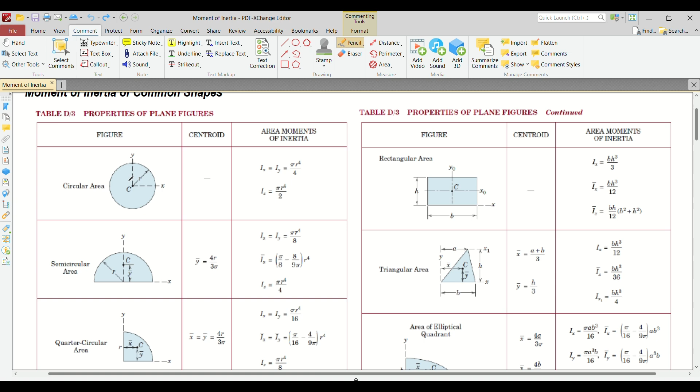Now, when our figure is not composite, let's say we have a circular figure, the moment of inertia is pi r to the fourth over 4. Remember, this is centroidal, since we have different moments of inertia. When we say centroidal moment of inertia, it means you are getting the moment of inertia about the centroid. That's also true especially if the material doesn't change; the centroidal moment of inertia and the moment of inertia about the neutral axis are just the same. Let me repeat, the centroidal moment of inertia is always with reference to the centroid. So now we have for circle pi r to the fourth over 4.

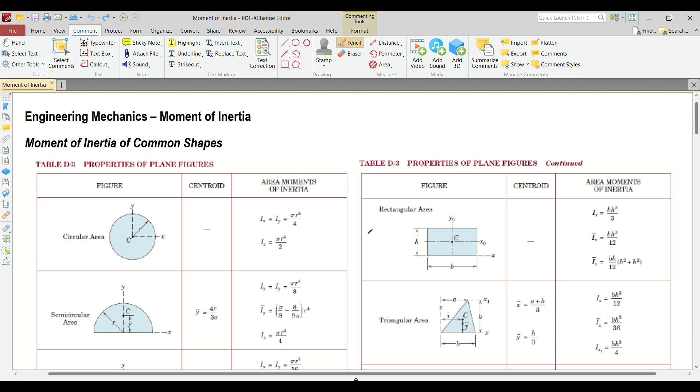Now for rectangle, that's bh cubed over 12. So what is this bh cubed over 3 for? This is if we're getting the moment of inertia about this x-axis. There are actually two, and in fact there are many, it all depends on your reference. In our case, since there's no bar, usually when you get the centroidal moment of inertia there's a bar. Since there's no bar, it means the moment of inertia being taken is about the x-axis. Since this one has a bar at the top part of letter I, we're getting the moment of inertia about this centroidal axis.

Again, let me repeat, if we have a homogeneous material, meaning our material is the same, then the moment of inertia about the neutral axis is also equivalent to the centroidal moment of inertia. So now it depends - we have Ix bar and Iy bar, and we also have Ix and Iy. So it has a lot of variation in the formula, but we're going to discuss I NA for now.

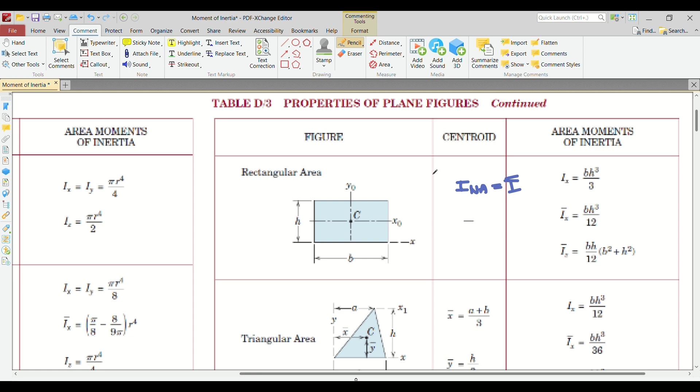Now, how do we get the moment of inertia about the neutral axis, especially for irregular figures? If a given shape's moment of inertia is being evaluated about an axis that is not coincident but parallel to its centroidal axis, we use the transfer formula. The transfer formula states that the moment of inertia about any reference axis parallel to one of the centroidal axes is equal to the sum of the moment of inertia about the centroidal axis and the product of area multiplied by the moment arm about the reference axis, squared.

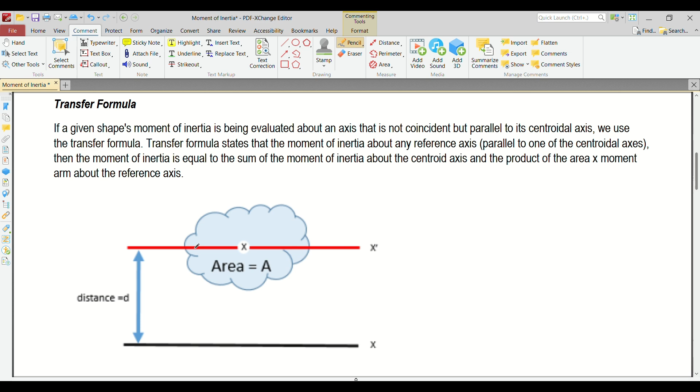So let's say we're going to find the moment of inertia of this figure. According to the formula, to get the moment of inertia about this axis, that is equivalent to the summation of the centroidal moment of inertia of this figure, plus the area of this figure multiplied by the distance of the centroid perpendicular to your reference, squared. So if this is your centroid and this is your reference, the distance here is D, and you square that. So this is the resulting formula.

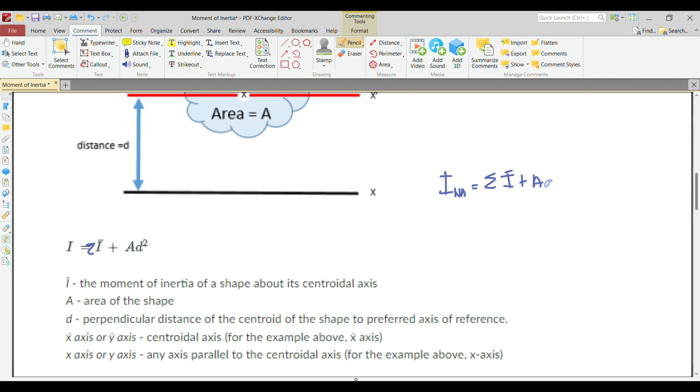Let me fix this. So the moment of inertia about the centroidal or neutral axis is equivalent to the summation of I bar plus AD squared. Again, the I bar there is the individual centroidal moment of inertia of the individual figure, the area A is the area of the individual figure, and D is the distance of the overall centroid versus the individual centroid, which you then square.

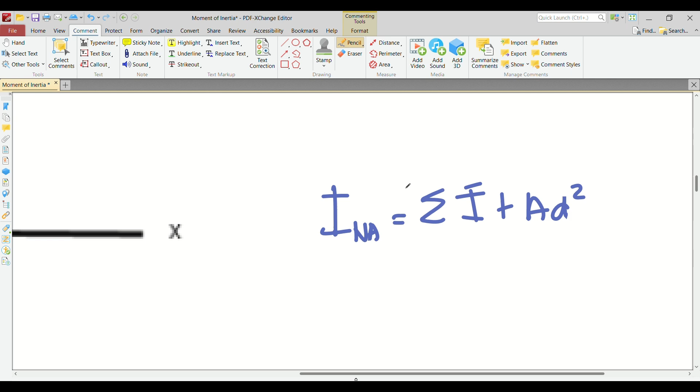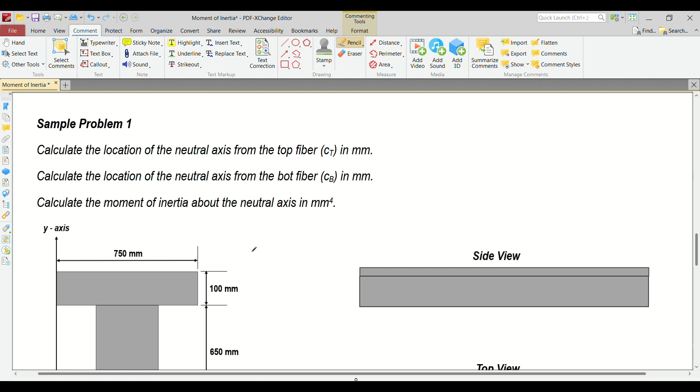So to understand this better, let's try to solve this problem. It says: calculate the location of the neutral axis from the top fiber, CT, in millimeters; calculate the location of the neutral axis from the bottom fiber, CB, in millimeters; and letter C, calculate the moment of inertia about the neutral axis in millimeters to the fourth power.

Now, this is our figure. If you look at the side view, this is how it looks. If you look at the top view, this is how it looks. So now, how do we solve this figure?

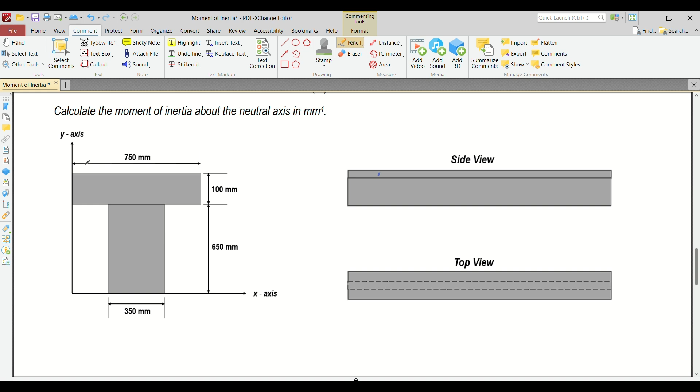In order to solve this figure, the first thing you need to do is set the reference axis. So this is my x-axis, and this is my y-axis. The next step here is to get the centroid of this figure. How do we get the centroid?

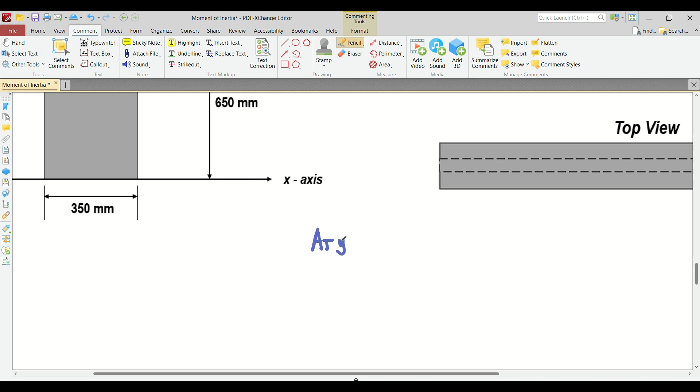We have a concept called Varignon's theorem. What is Varignon's theorem? It states that your total area multiplied by the centroid is equivalent to the summation of the individual areas multiplied by the individual centroids, however many there are.

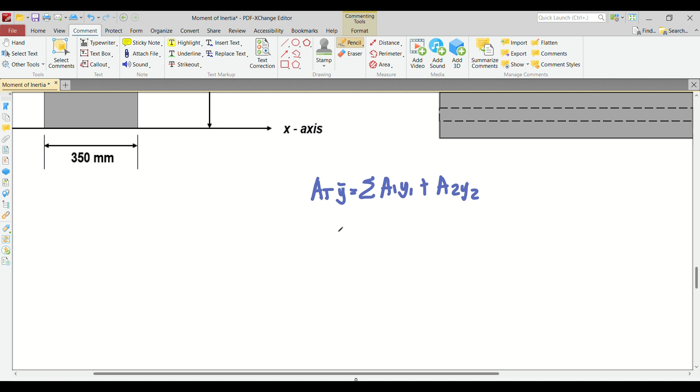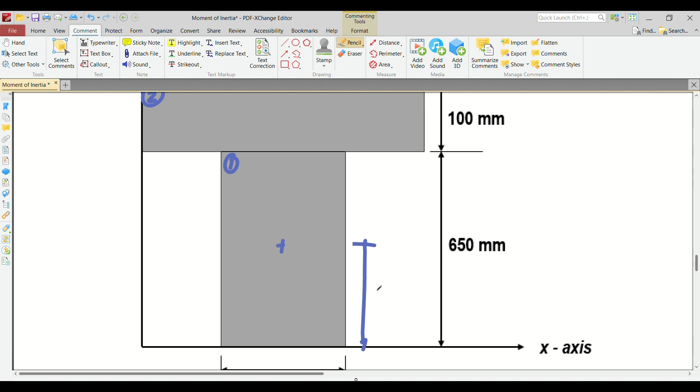So, to get the y-bar, that is equivalent to area 1 and area 2. In our case, let's assume this is area 1, and this is area 2. Our individual centroid, with reference to the x-axis, is here. The distance is, this is 650, half of 650 is 325. So this is 325 mm. Now, for the one at the top, this is its centroid. So what would that be?

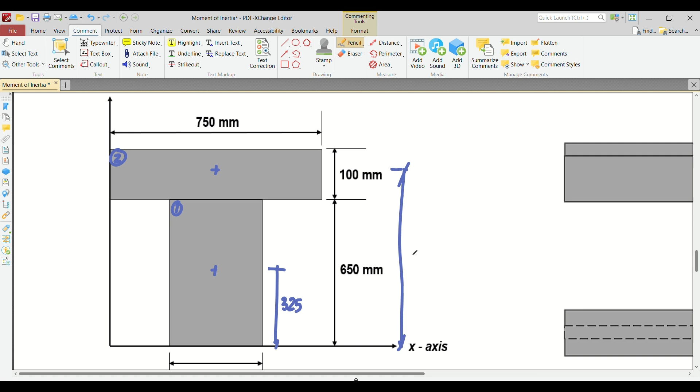So, ang distance nito is 650 plus kalahati ng 100. So, that is 700. Okay? So, ngayon, meron na tayong individual centroid.

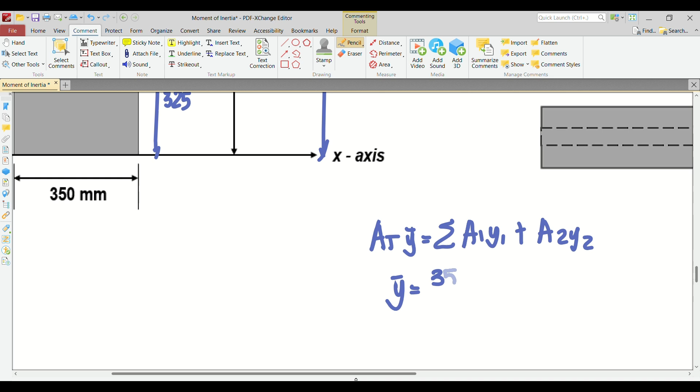Madali naman kuhanin yung area. So, let's proceed, yung area 1 natin is just equal to 650 times 350. So, ilagay natin: 350 multiplied by 650 multiplied by the individual centroid. So, that is 325.

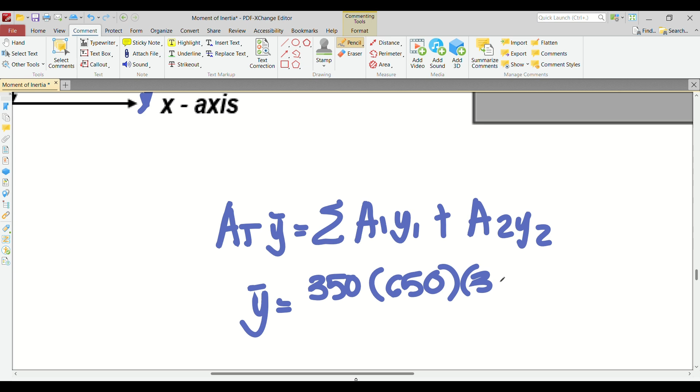Okay? So, plus area sa taas, that's 750 times 100. So, ilagay natin dito, multiplied by individual centroid, that is 700.

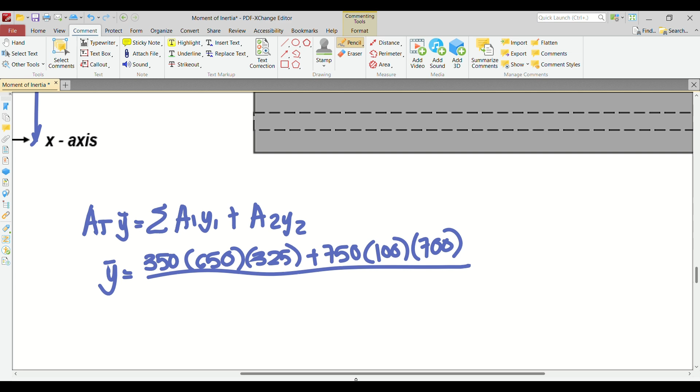Okay? Divided by the total area, which is equivalent to 350 times 650, plus 750 multiplied by 100.

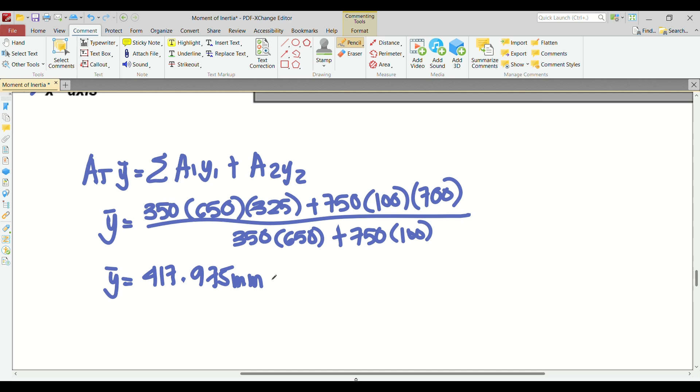So tignan natin yung problem number 1, yung unang tanong. Sabi dito, calculate the location of the neutral axis from the top fiber. So, ngayon, ang nakuha natin is centroid.

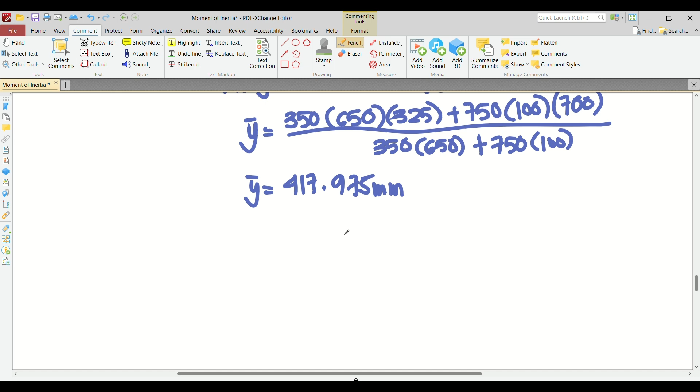If we have a homogeneous material, ibig sabihin, ito yung concrete din, or itong nasa baba, concrete din, or parehas silang steel, or parehas silang timber. Kapag ganun yung scenario, kung ano yung centroid mo, yun din yung neutral axis mo.

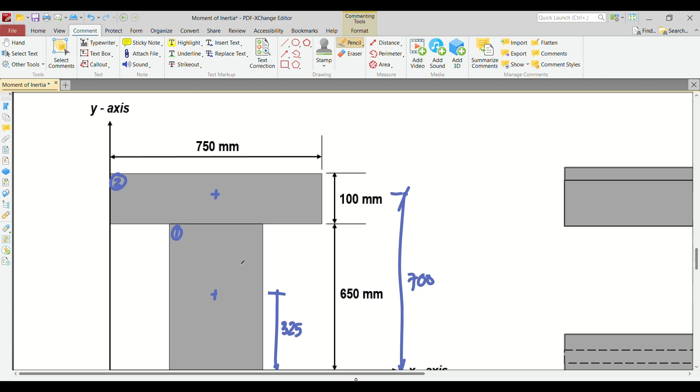Nagkakaintindihan? If you have a homogeneous material, kung ano yung centroid mo, yun din yung neutral axis mo. So, since this is probably a homogeneous material, therefore, ito rin yung centroid natin. And remember, that is with reference to our x-axis at the bottom.

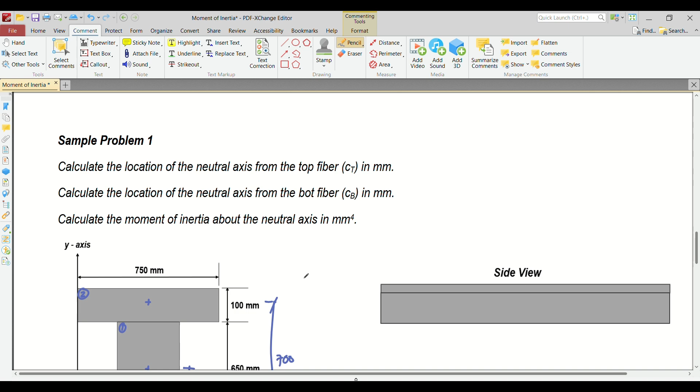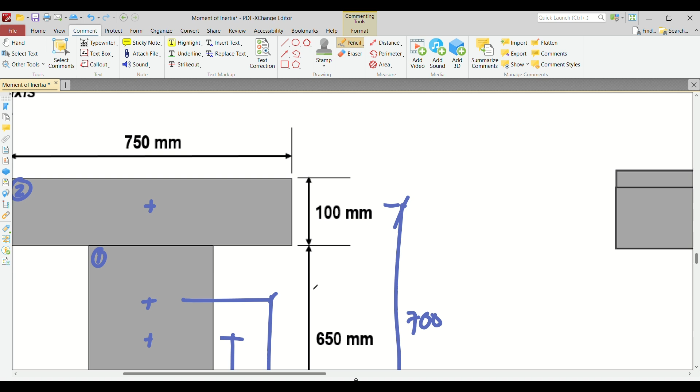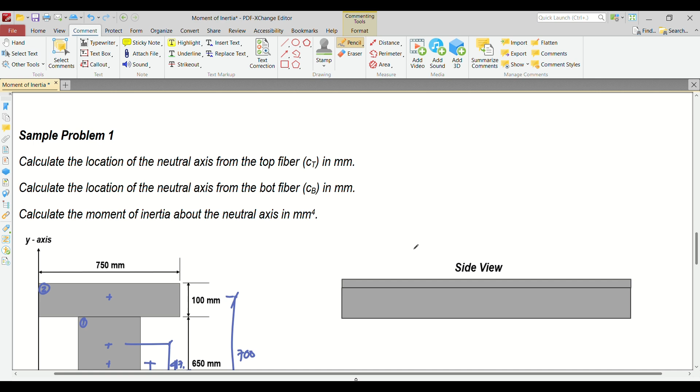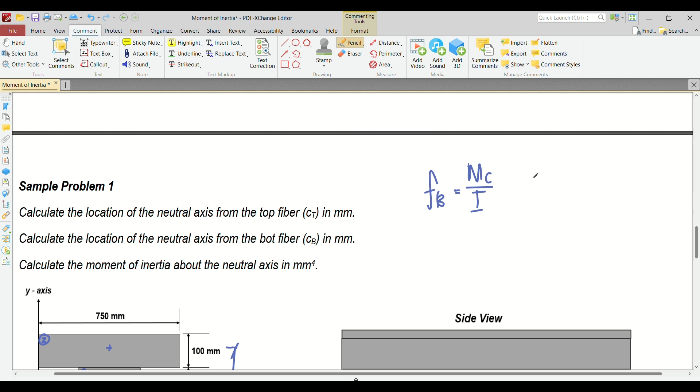Okay? So, ngayon, this is 417.975. Ang hinahanap sa atin is C sa top. Saan ba ginagamit yung C sa top? Di ba meron tayong bending formula na MC over I. So, yung C, it can be either C sa top, tsaka C sa bottom. So, in our case, ang hinahanap, C sa top.

So, ano ba yun? Ito yun, so from here to here. Yan yung tinatawag natin na C sa top. So, now, how do we get that?

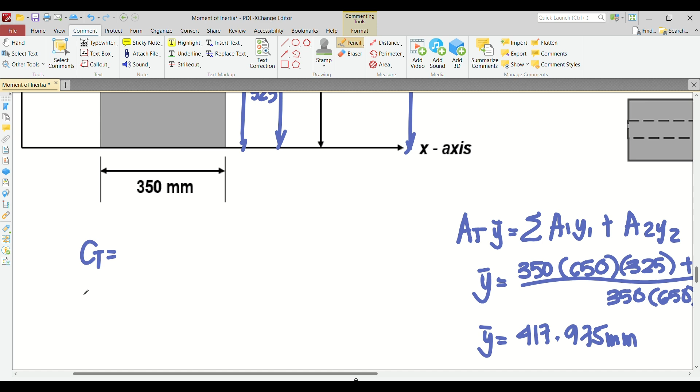Madali lang. E di yung total height, minus mo lang ng 417.975. So, therefore, if we're going to find C sa top, that is just equivalent to ano ba yung total height natin? 650 plus 100, so that's 750 millimeter minus 417.975 millimeter. Okay, yung C sa top natin is just equivalent to 332.025 millimeter.

So this is now your answer for the first statement. Box ko lang.

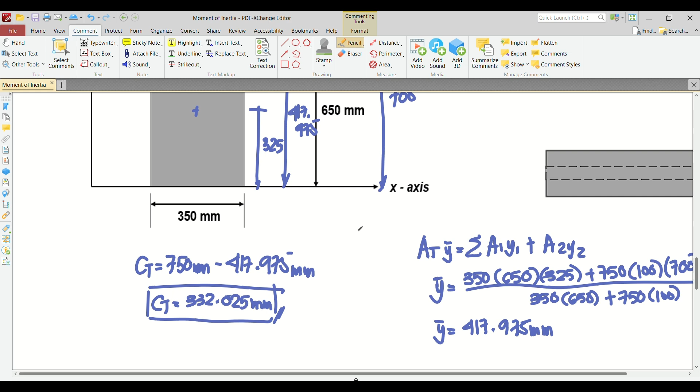Okay? So ngayon, anong tanong sa pangalawa? Calculate the location of the neutral axis from the bottom fiber. O di ba ito yung bottom fiber, yung nasa x-axis natin.

So ngayon, ito naman din yung ating CB. Kasi ito yung centroid, ito yung bottom fiber, coincide dun sa neutral axis natin. So therefore, na-compute na pala natin yung CB, which is equivalent to 417.975. Same lang sila ng y-bar.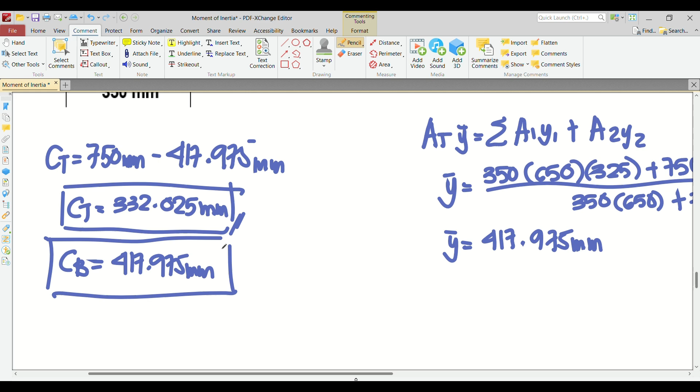Okay? Kasi ito yung y-bar natin. Lagay ko na nga. Okay?

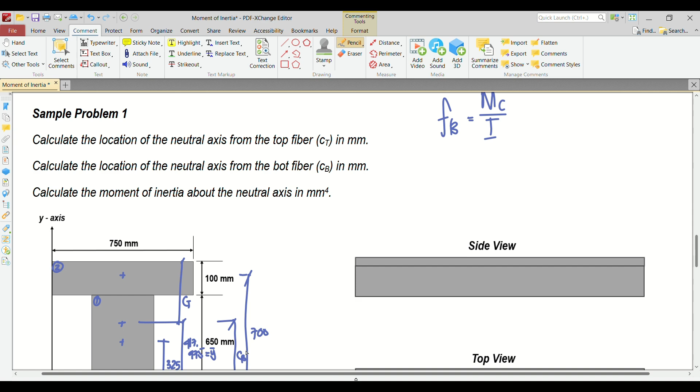Okay, so ano yung susunod na tanong? Sabi dito, calculate the moment of inertia about the neutral axis. Now we have two moment of inertia na centroid. So number one is...

I, neutral axis with reference to x. Tsaka number two is I, neutral axis with reference to y. Kapag I NA x, that is summation of I, O, or centroidal moment of inertia, plus, or minsan bar yun nilalagay, plus A dy squared. Yung dy natin is the centroid of the individual figure minus the general centroid in y-axis, kasi perpendicular to the axis considered.

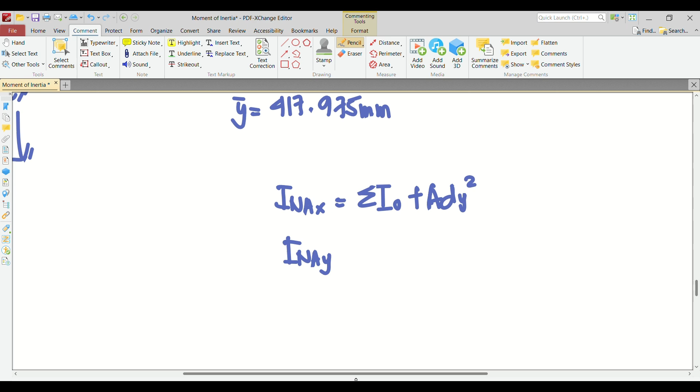Remember right here, yung d na kino-consider natin, for example, ito yung axis na sinosolve mo. Yung d na kino-consider natin dito is dy kasi pataas, hindi siya papunta sa left, papunta sa right. Okay? So, ganun din dito.

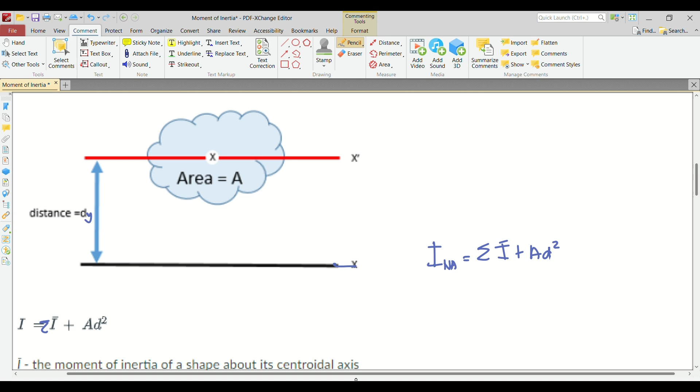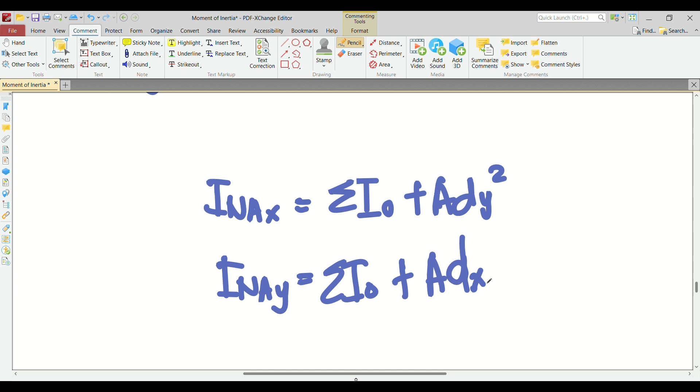If I NA x yung hinahanap mo, so syempre, yung gagamitin mong d is with reference to y. Okay? So, ngayon, kapag I NA y naman ang hinahanap mo, so yung d mo dito is with reference to x. Tapos may square diyan.

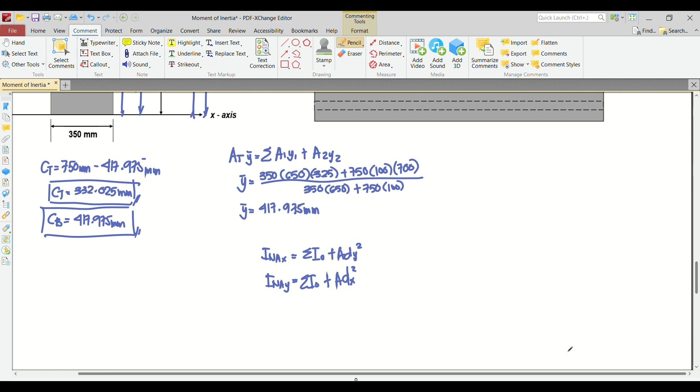Okay? So siguro solve na rin natin parehas. But before that, we must need to identify what is the centroid or what is the distance of the centroid from our y-axis. Okay? Para ma-solve natin yan, Varignon's lang din.

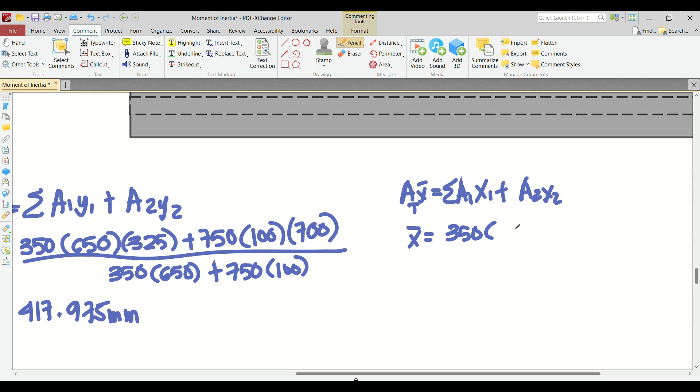So, that is x bar is equivalent to, sulat ko na nga rin dito, A1 summation. Okay, so therefore, this is 350 multiplied by 650, the area of our first figure. And then the centroid of that with reference to our y-axis is...

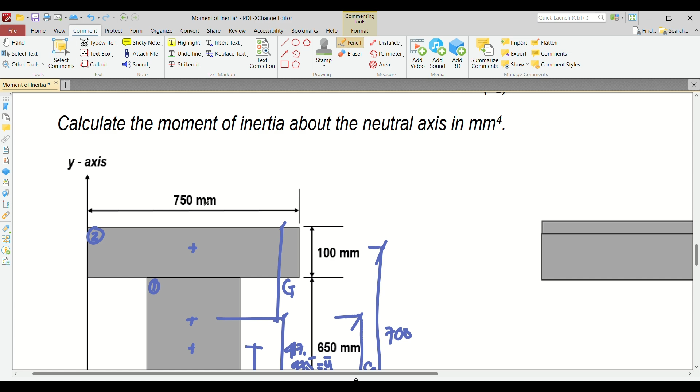Kalahati ng 750, ito di ba? 750 divide 2. Ilang kaya yun? 375.

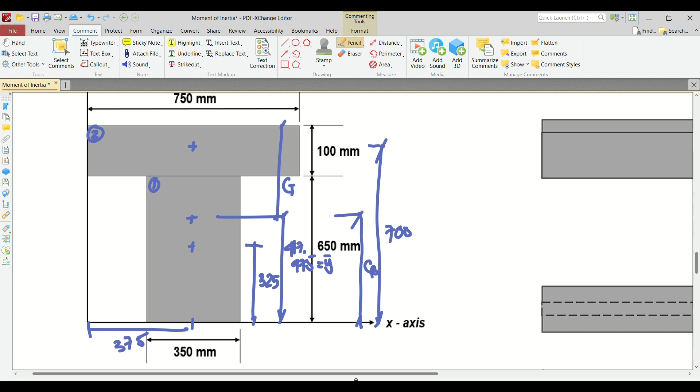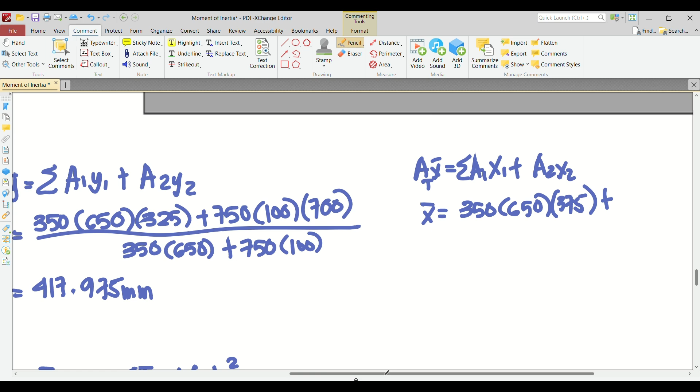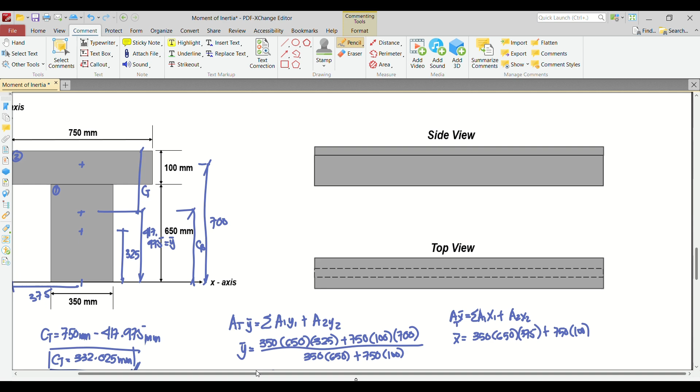So, ilagay natin dito. 375 mm, plus area 2, that is 750 times 100. Tapos, distance niyan ulit, ganun lang, pareha sila, no? Kasi rectangular lang naman yan. So, ito, 750. 750 divide 2. So, malamang ito rin 750 divide 2, no? Okay? Kasi nasa center naman itong rectangle na to eh, no?

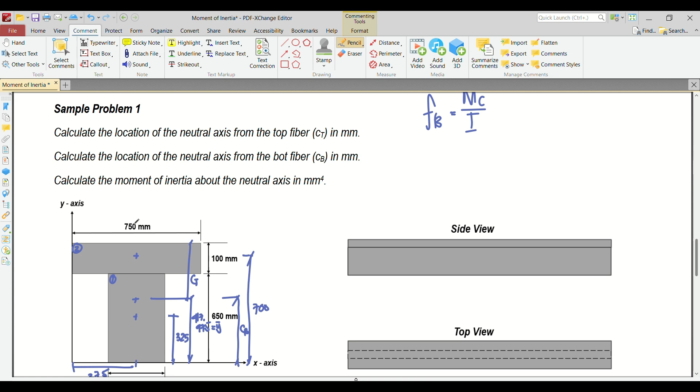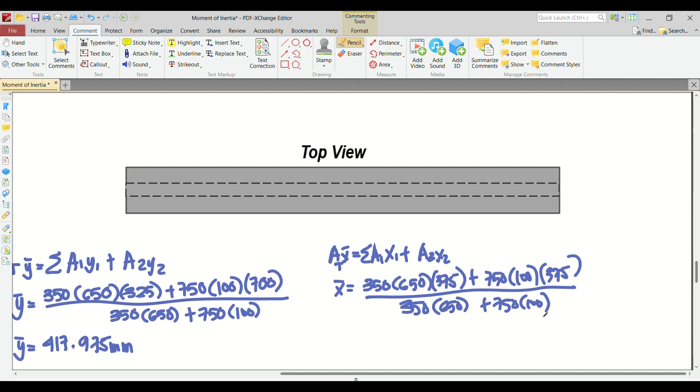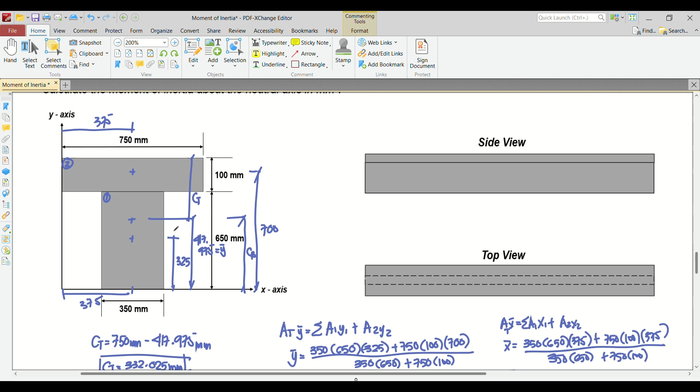Again natin. This is 375. Okay? Divided by the total area. 350, 650, plus 750 times 100. So, kapag sinolve mo yan, mapapansin mo na yung x bar mo is just equivalent to 375. Actually, by inspection, alam mo na agad yan, kasi nga, with reference to y-axis, ang centroid nito 375, ang centroid din nito 375. Since pareha sila, malamang yung centroid na to, itong x bar natin, is just equivalent to 375 mm.

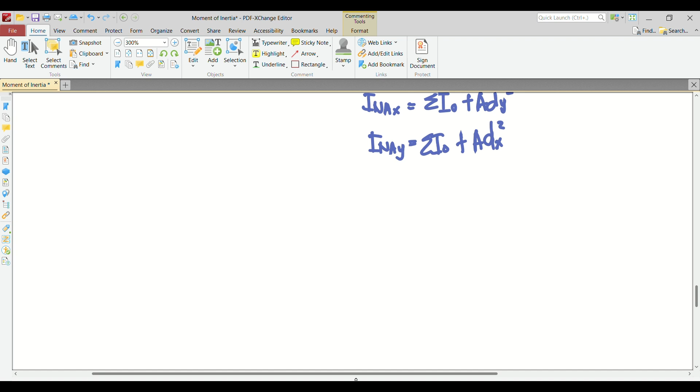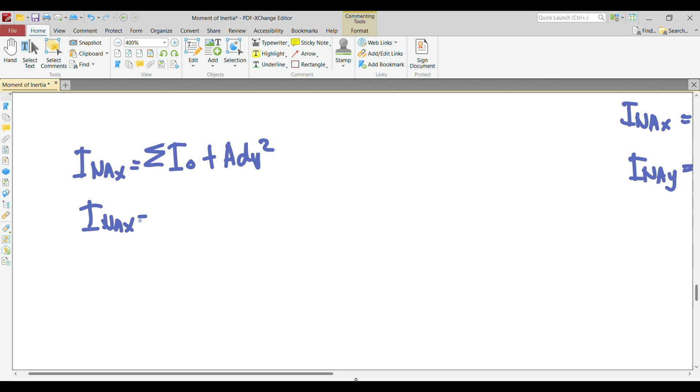Okay? So ngayon, let's try to compute. Unahin na natin si I NAx, no? Sige, dito na lang. So I NAx, that is the summation of IO or centroidal moment of inertia plus ADY squared. So ngayon, birahin na natin. I NAx, ano yun? Unahin muna natin yung first figure. Diba? BH cubed over 12.

So ang B is 350, ang H is 650 with reference to the first figure. So lagay natin dito: 350, 650 cubed divided by 12. And then plus 350, 650, the area, d squared, dy squared.

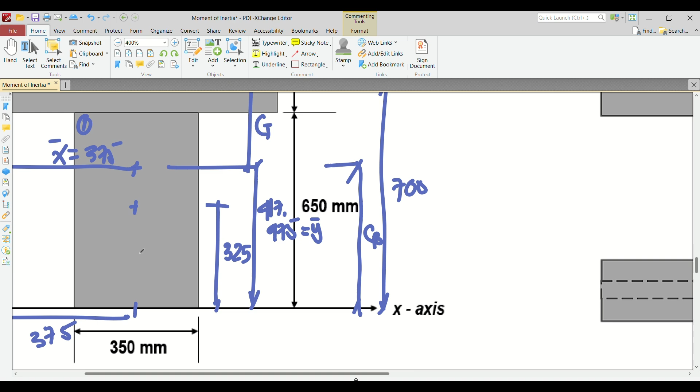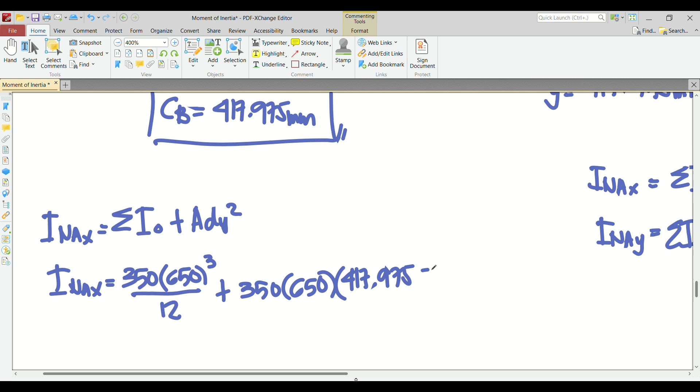Ano yung dy squared naman natin? Again, distance yan from the general centroid minus the individual centroid. Or ito, tinatawag natin dy. Okay? So, ilan yan? Edi 417.975 minus 325. So, lagay natin dito: 417.975 minus 325. Don't forget, kailangan mo siyang square. So, that is for our first figure.

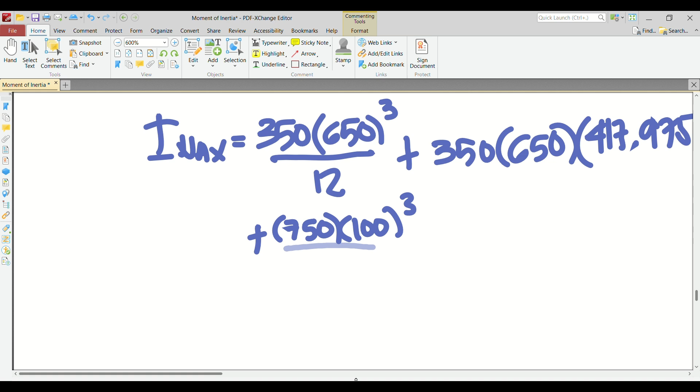For our second figure, ito naman yun. So, gano'n lang ulit, BH cube over 12. Our B here is 750, and then ang H natin is 100. Okay? B, 750, 100, cube, divided by 12, plus, area, 750 times 100, centroid, or dy squared.

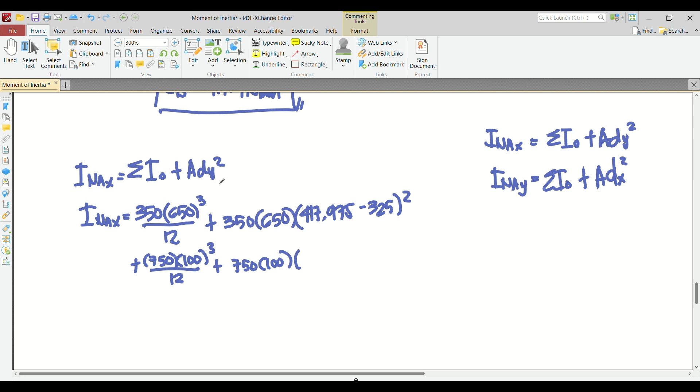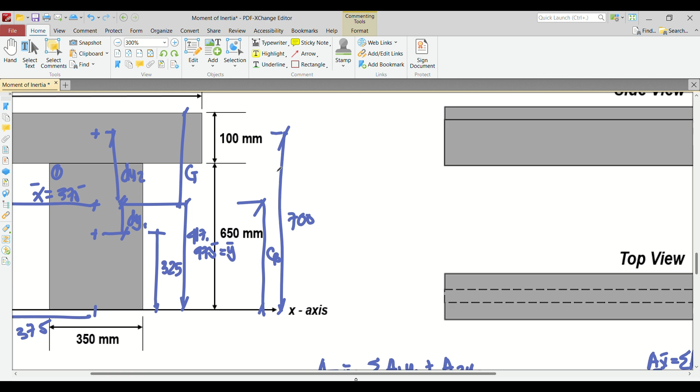Ano yung dy squared niya? Lagyan natin to dy1, ito dy2. How do we get this distance? So basically, that is just equal to 700 minus the centroid. Okay? Itong isa, minus ito, makukuha mo yung dy2. Okay? So, 700 minus 417.975 squared. So, therefore, ang I NAx natin ay 650 cube over 12...

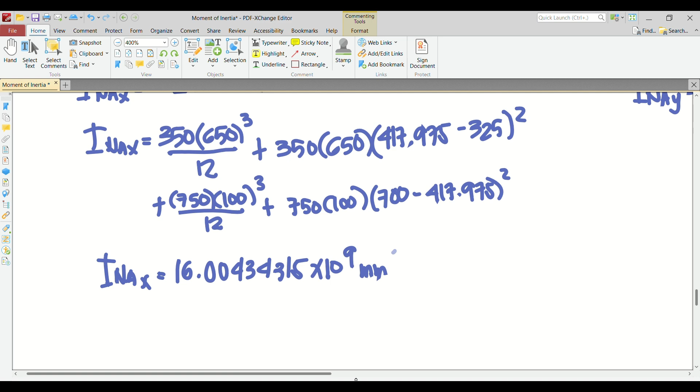Kung tama ang nakukuha ko is 16.00434315 times 10 raised to 9 millimeter raised to 4. So this is your first answer.

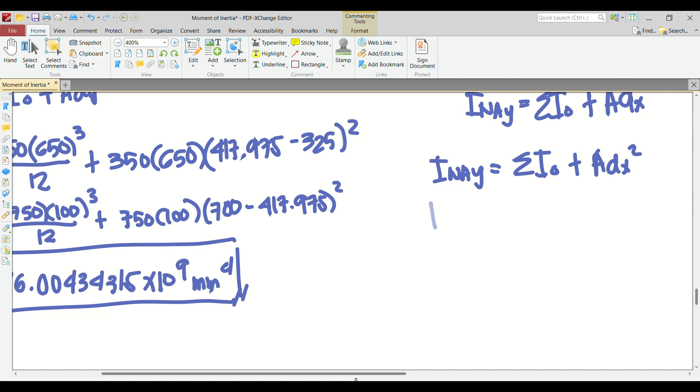Okay? So ngayon, punta naman tayo sa INAY. So ganun nga ulit, summation, individual centroidal moment of inertia about the centroidal axis plus ADX squared. Okay? INAY. Siyempre, centroidal moment of inertia about y na tayo. So, hindi na yan BH cube over 12, kundi HB cube over 12.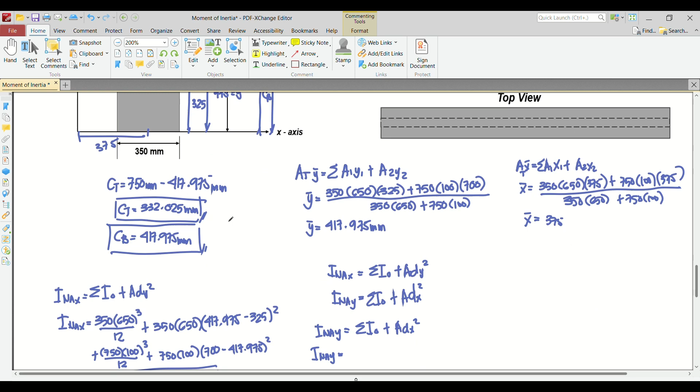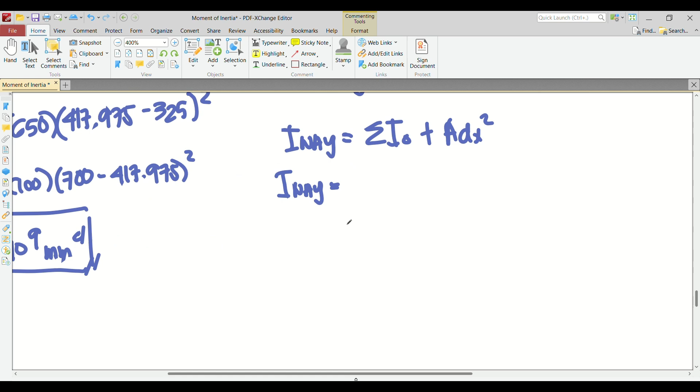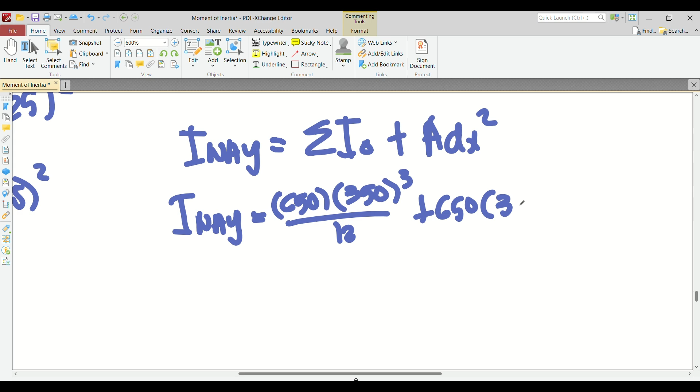So, ang ating H with reference to this figure is 650 at 350. Okay? Magpapalit lang sila na magiging ano lang to, 650. Tapos ito, HB cube eh. Ano yung B natin? 350. Cube over 12. Ngayon, plus 650, 350. Tapos, ano kaya yung dx natin? Dx natin doesn't have any value. Why? Because our general centroid and our individual centroid coincide. Wala silang difference between the x distance. So, therefore, this is multiplied by 0. So, this will become 0.

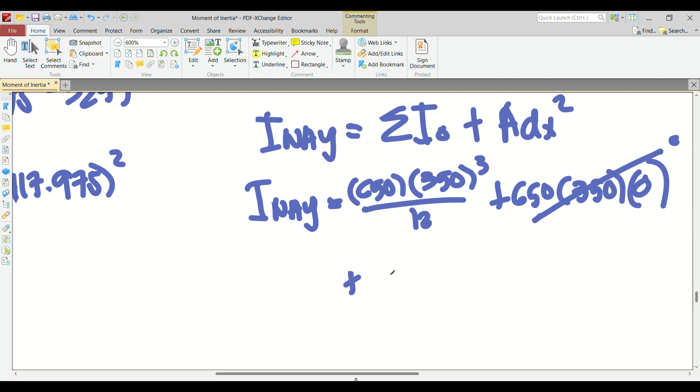So, plus, again, ano magiging height na natin ngayon? 750, tapos yung base na natin is 100 or HB cube. 100, 750 cube over 12 plus 100 times 750. And then again, since nag-coincide yung individual centroid at general centroid, so therefore yung dx mo will be equivalent to 0.

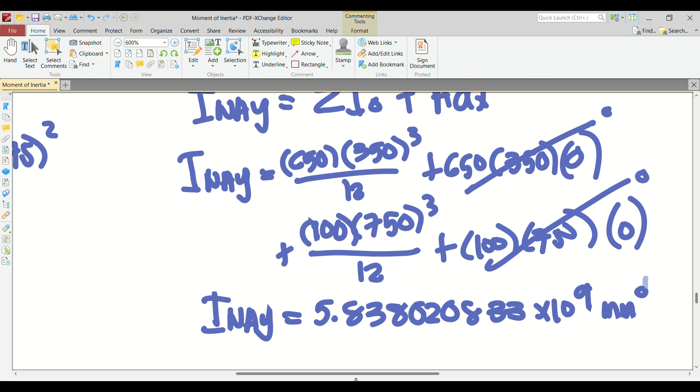Okay? So yung INAY natin is equivalent to 350 cube over 12 plus... so ang nakukuha ko ay 5.838020833 times 10 raised to 9 millimeter raised to 4. Okay? So that is now our answer.

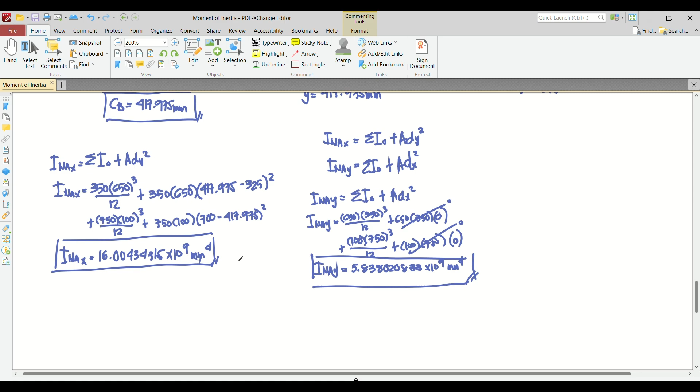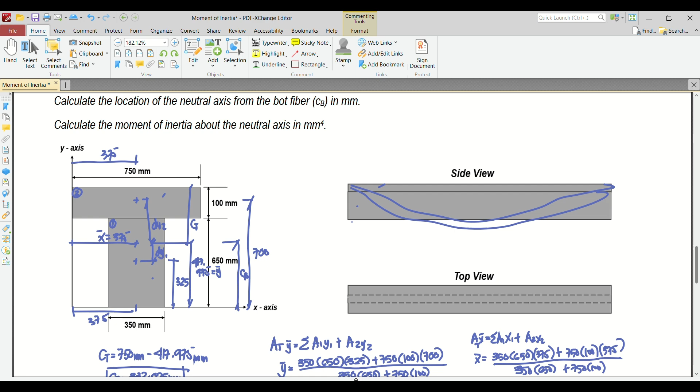So ngayon, anong gagamitin mo dyan sa dalawa? Kasi dalawa yung binigay natin eh. Anong gagawin mo dyan? Especially if you're solving for stress. So ngayon, if you're solving for stress, if ito yung side view mo, no? Ngayon, ito yung flange natin. Ito yung nasa baba or yung web, ito rin yung web natin. Kapag ganito yung bending mo, class, ibig sabihin, nagiging ganito yung flange mo, lumulundo ng paganyan. Kapag ganyan yung scenario, class, ang gagamitin mong moment of inertia in computing the bending stress is INAX.

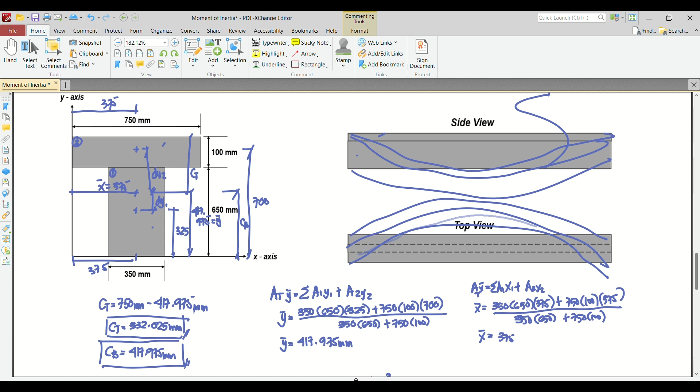Ngayon, take a look at this one. Ito yung top view ng ating figure, no? Ito yung flange mo, ayan yun. Tapos, ito yung web. Now, if that's the case, ano yung kinoconsider mo kapag gagamit ka ng I_NAy? So, ganito yung bending na kinoconsider mo. Possible na pwedeng maging ganito, paganyan, parang sideways, no? So, ibig sabihin, if normal bending ang kinoconsider mo, yung pag-bend ng paganitong direction, ang gagamitin mo, I_NAx. Okay? Especially in computing for the bending stress. Ngayon, kapag ganito yung bending mo, para siyang torsion o parang siyang nagbabakel papunta sa gilid or sideways, kapag ganyan yung scenario, ang gagamitin mo na moment of inertia about the neutral axis is I_NAy.

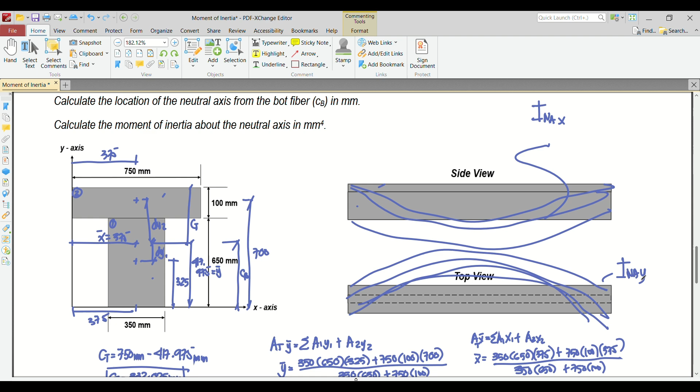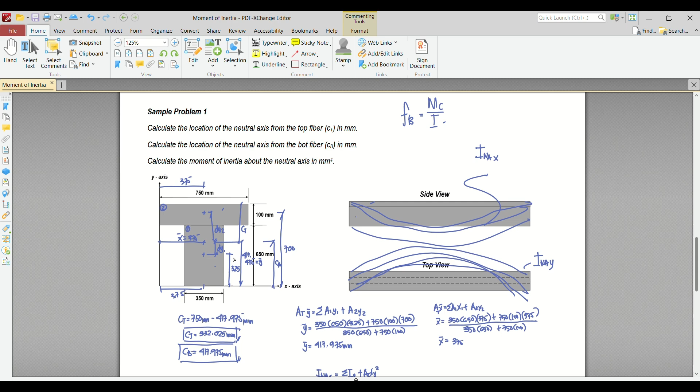Okay? So, if you do have questions, again, for getting the moment of inertia, just ask me. But, again, this is just a review. I hope that you review all of the topics na diniscuss niyo about moment of inertia in your statics period. Okay? See you on next meeting.